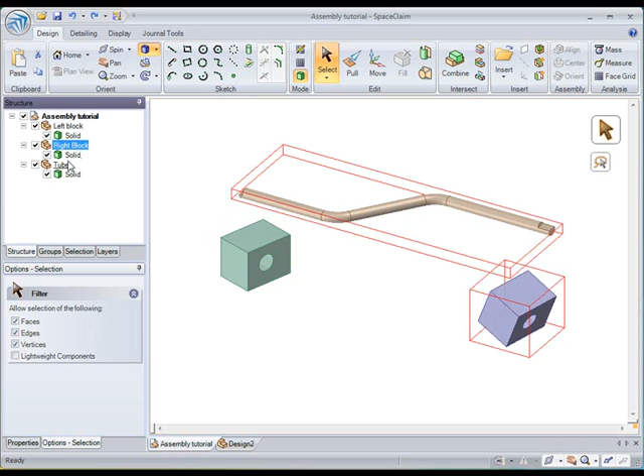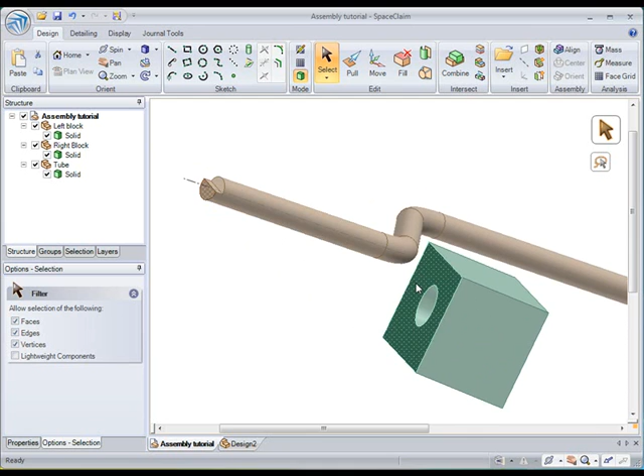Let's start off to assemble these components together. I'll start off and assemble the block to the tube. The way that assembly works is that I pick one face and control-select another, so I'm basically assembling face 1 to face 2. I'll click Align and our green box pops into place. Now we'll do the same with our cylinder and combine this first surface to the second one and hit center.

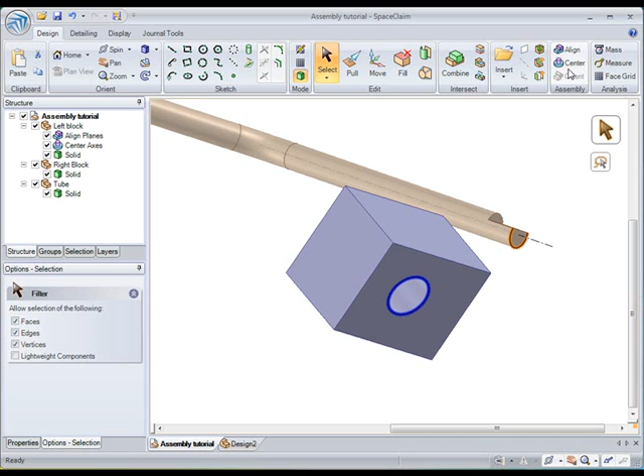Now let's go ahead and assemble our purple box. This time I'm going to click on the purple edge and I'll click on the orange edge here. You'll see with the edge of a cylinder I can do the align and center at once because it defines an axis and a plane.

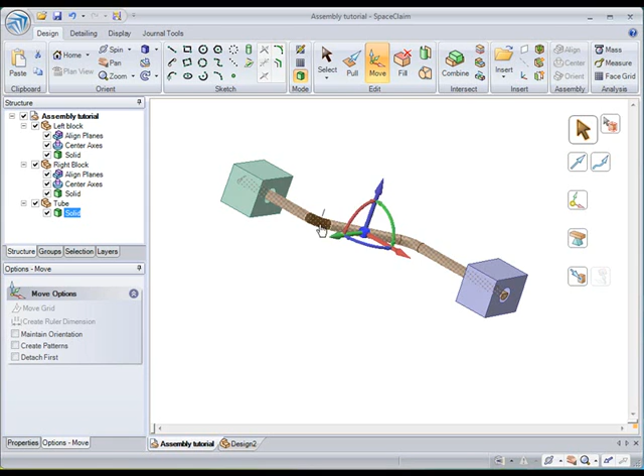So now we have everything assembled. We'll go ahead and move our tube. Notice when I rotate it, the blocks stay assembled. I can rotate one way or rotate the other. If I want to, I can even drag our move tool over here, and notice just the purple box rotates because the axis isn't changing on our green box.

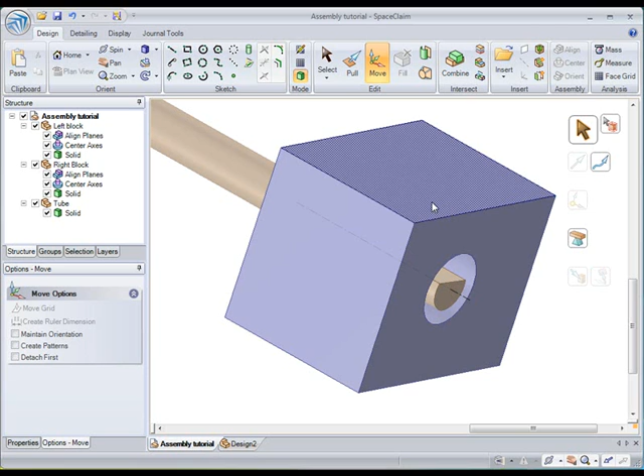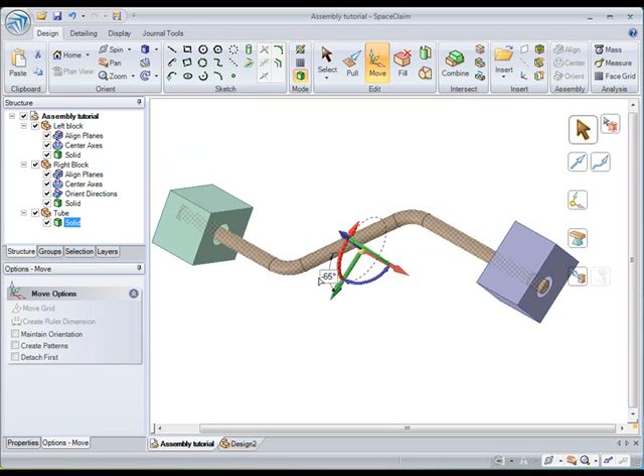But let's look at our third assembly condition, and that's orient. You'll notice that I have two faces here. So once a block or anything is centered, you can then orient one of the faces. I'll orient this purple face to the orange one and hit orient, and notice our orient direction pops up in the assembly tree. Now you'll see when I go ahead and move the tube, the purple face, the top of it, is changing, whereas the green face on top is staying parallel to the initial position. This allows you to decide which face you want to stay in a particular direction.

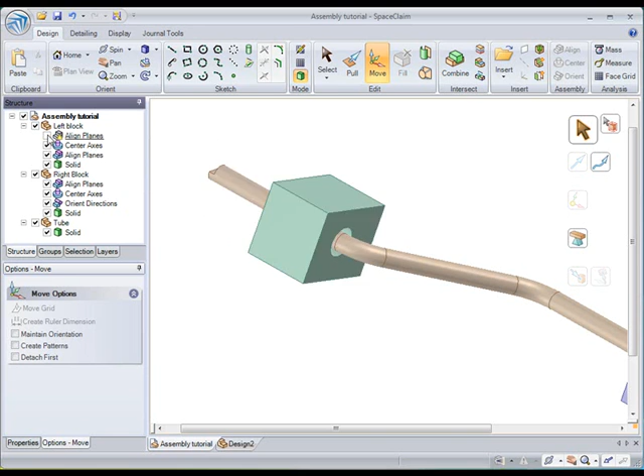Now let's examine some more things in assembly. Maybe I've changed my mind and I want this face to be aligned here. I'll try to align them, and notice that our new aligned plane has a yellow triangle next to it, showing it's not meeting that assembly condition. But if I turn off our last aligned plane, it snaps into place, showing that you can over-constrain a model and choose which one you want it to be assembled to at what time.

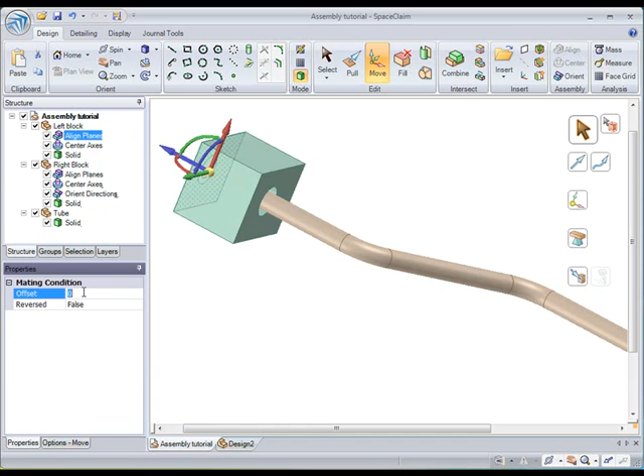So let's go ahead and delete this condition I set up. I'll delete that mating condition, and instead let's look at the properties of our first aligned plane. If I right click and go to properties, you can see that I can create an offset with this align. So let's type in 10 millimeters, and notice that it pops down, but this plane is still aligned to the first one we chose, it just now has an offset.

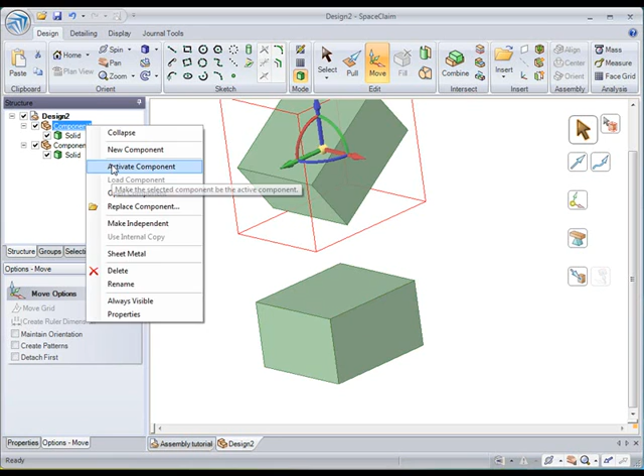So let's go into our second way of assembling components. You'll see I have two solids set up, and I want solid 1 on top to rotate about this axis. The way I can do that is I can place an axis in that component. I'll activate component 1, select the edge, and put an axis in. I'll do the same with component 2, activating it, selecting that same edge, and putting another axis in.

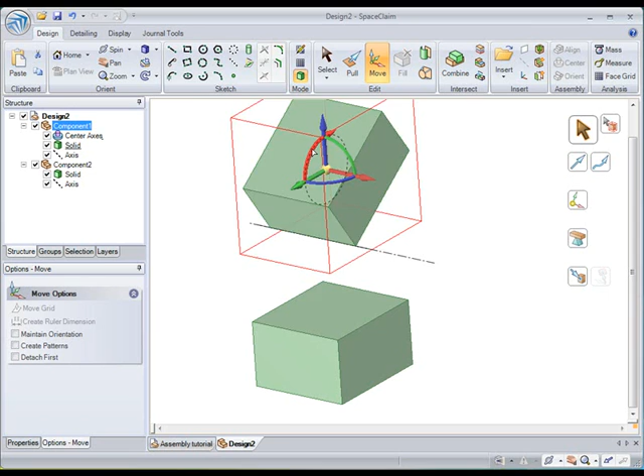So now I can go ahead and select the axis and select the second axis, and I'll center them together. Now notice we have a center axis pop up, but if I go to move the solid, it really doesn't look like I did anything, and the solid's moving freely. But now if I go to move that component, the component is assembled together, and you'll see that it's centered on that axis. So this is one more way you can assemble components in SpaceClaim.